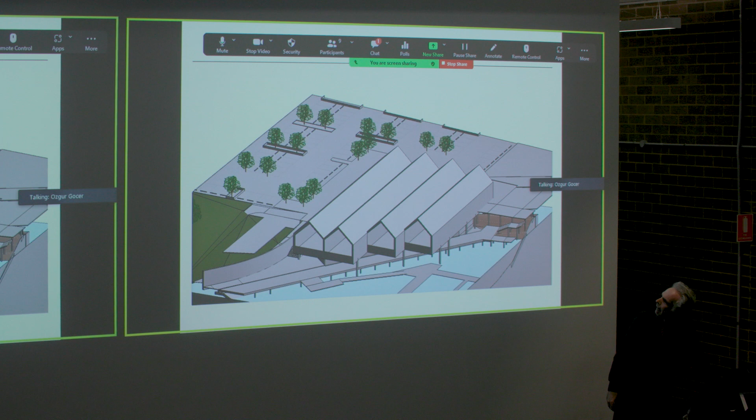So we don't have a whole lot of input into the design. This is the schematics we were given and the sketches. And this is us—we start in stage 0. We start with structural massing.

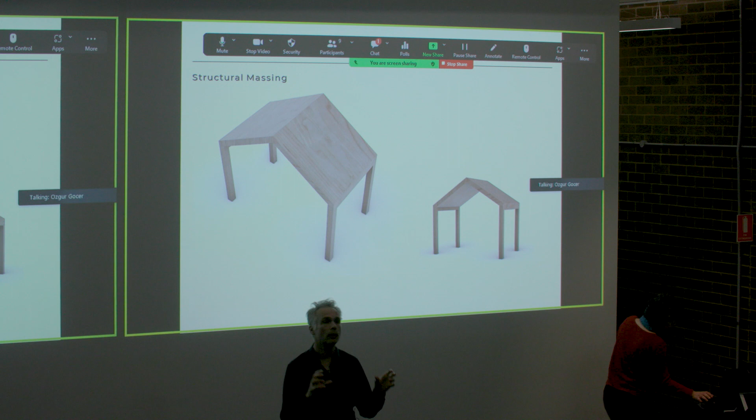So we determine where the zones for the structure can go. From this you can see that we have spaces where we can put structure—that's basically what it is. We have a timber...

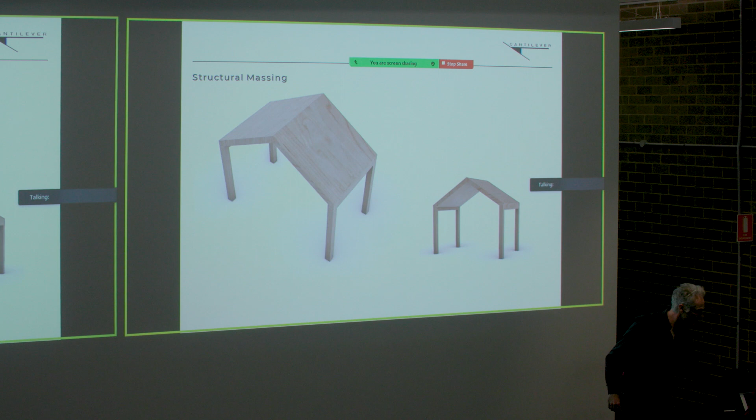So we have a timber-first policy. We do this in Rhino, and the original sketches we render in timber, just to remind ourselves that we should probably be looking at timber before any other material. So here we are—this is our first attempt with all timber.

Timber rafters, timber ridge beam, and a timber cranked portal frame. That should ring alarm bells for you, because that isn't really a thing—a cranked timber portal frame. I reckon each one of those would probably cost $25,000 to make.

So kind of thinking about it, and remember it's all about stability, which I'll touch on in a second. So these are the three challenges we had.

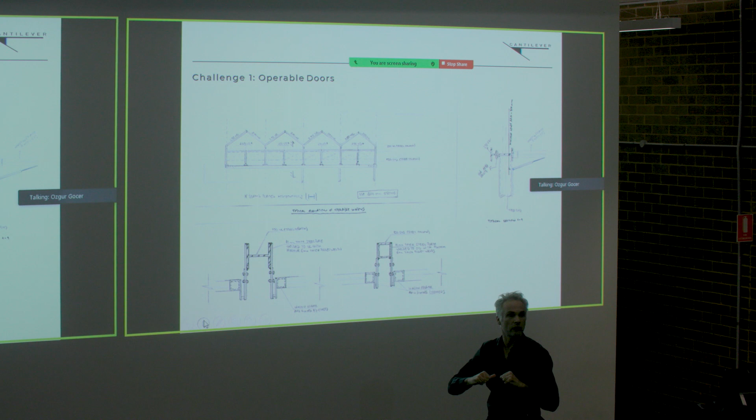The first was the operable doors. If you remember, the operable doors come with a strut that operates, and they wanted them to disappear as the doors opened. But the closer they get together, the bigger the load pushing back on the strut, and we wanted them really close. So the loads pushing back on the strut, which you can see here, are massive. We thought timber really doesn't suit that kind of thing.

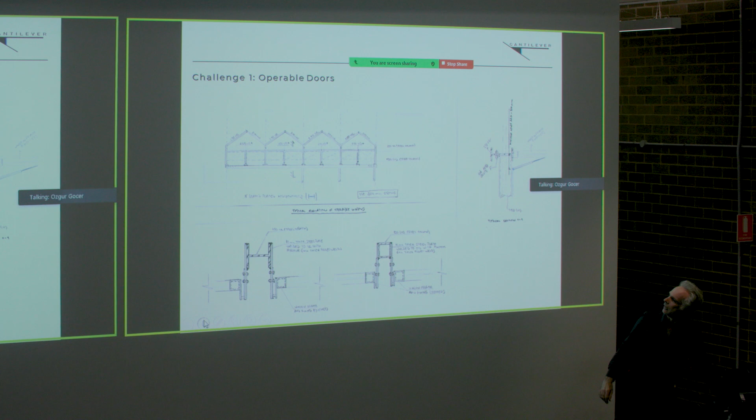So we thought for the operable doors, we'll do steel.

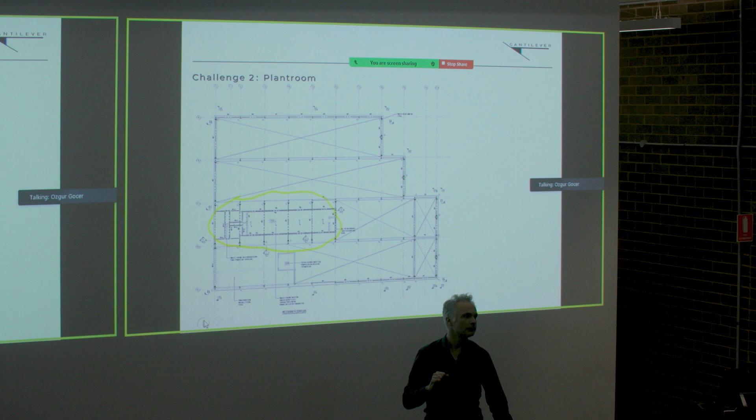The second challenge was there's a massive plant room in the middle of the building, open to the elements. This is right on the water, open to the elements, with heavy loads—probably doesn't suit timber either. So we'll do the operable door sections as steel, and we'll do the plant room as steel too.

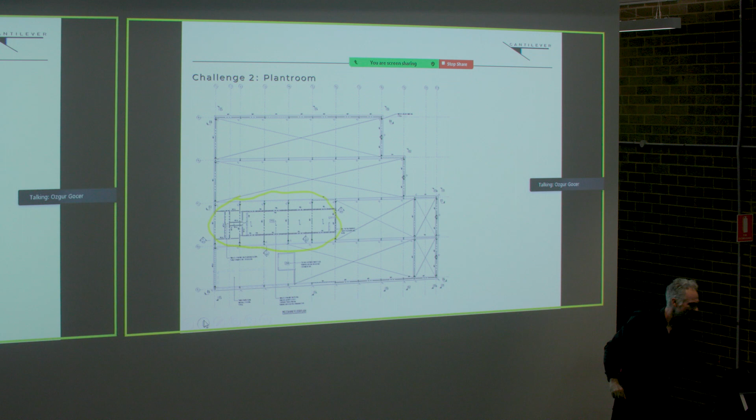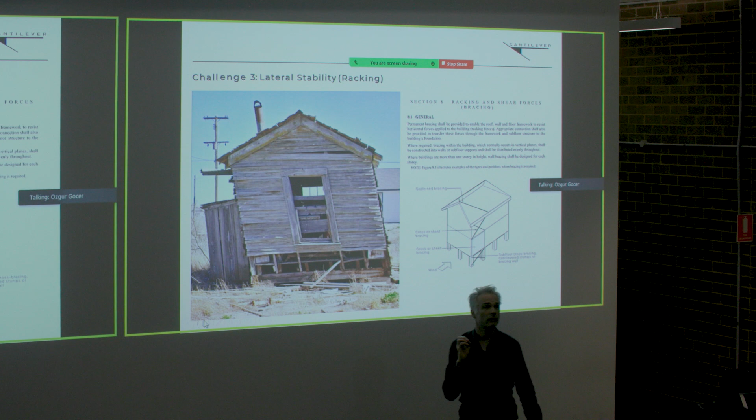And the third one is my favorite topic: lateral stability. This is an excerpt from AS 1684, which is 250 pages long. Every page counts—lovely read.

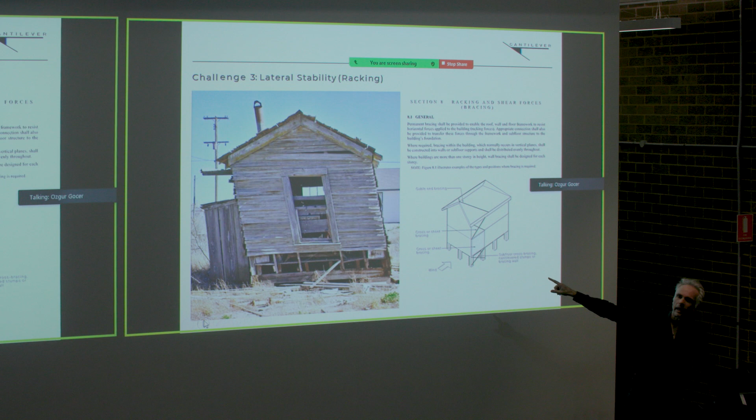But it's about holding this building up—it's about the cardboard box again without any ends. Now there are two different types of lateral stability: core diaphragm and distributed frame.

I won't spend too much time on this, but core diaphragm is where you have a concrete core—this is the Burj Khalifa. I had the joy, or not-so-joyous time, of working on the Burj Khalifa when I was at Hyder. It's a concrete core—a buttress core, a special buttress core, done by a very specialist engineer in the US.

Distributed frame—anyone know what the structure is for the Empire State Building? Steel, all steel. Any bracing? No bracing. Is it all welded? No, it's all bolted portal frames.

Apparently they didn't have computers back then, but apparently it's got massive capacity for lateral stability—it could take another 50 stories. Because they didn't know what they were doing, so they just overdid everything.

But now, well, look what I found—so here I was writing this seminar, and I was like, core, I wonder what else. And I thought everything needs stability. I looked around, I had these two tables in my office, and it's like, just a second—one has the core diaphragm, and the other has a frame distributed. Anyway, how bizarre is that?

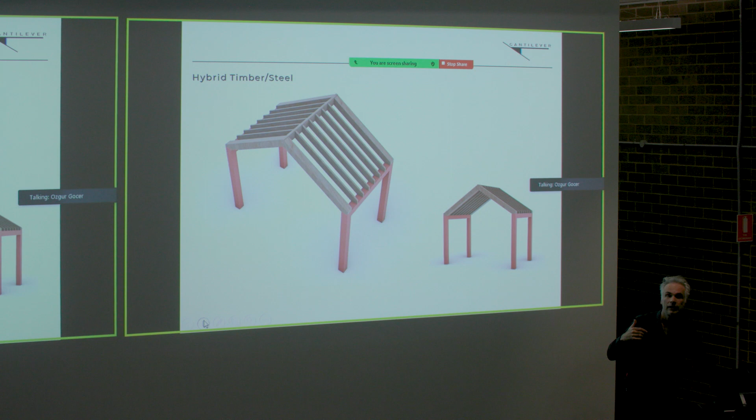So we started moving away from a full timber building, unfortunately. Remember, last week here I was presenting to the Timber Design Awards, and here I am moving away from timber—it gets even more embarrassing.

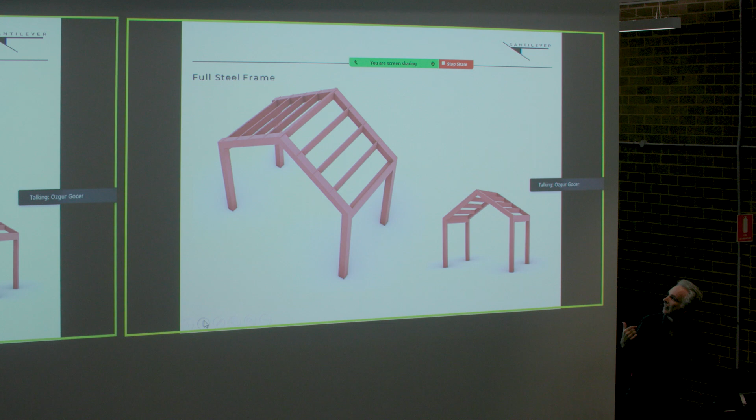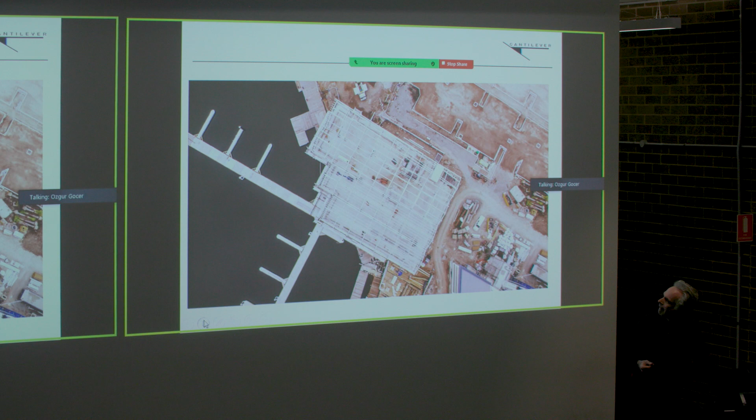So here we are—then we ended up with a full steel frame. And here it is during construction. What a great spot, look at that. And there it is again—I just wanted to show you the doors opening again and the lateral stability.

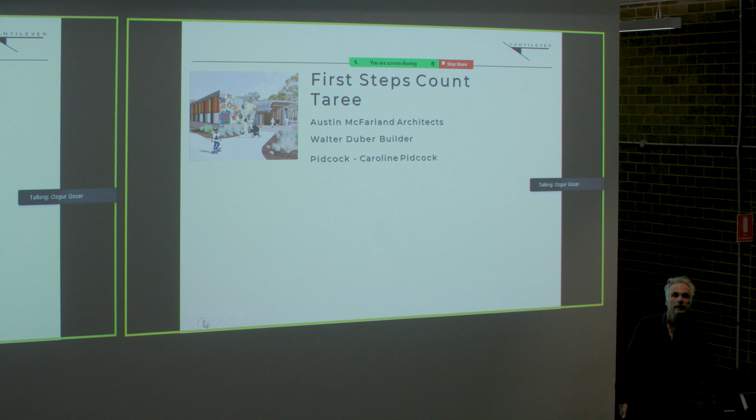Okay, final building: First Steps Count, Taree. Anyone know and love Taree? This is with Austin McFarland architects, Walter Duber the builder, and Caroline Pidcock, regenerative design guru. This started as a Living Building Challenge, but it ended up getting abandoned because it's so onerous—we couldn't satisfy the water petal. The EPA just got in the way, so we abandoned it completely, but it still has its principles.